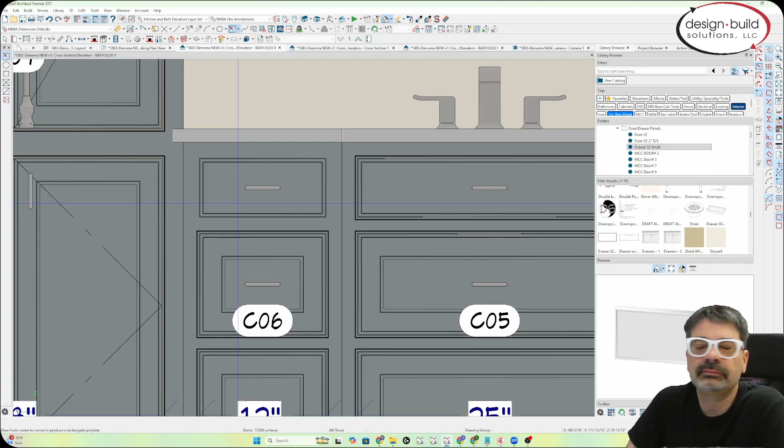So what I did with this situation was, let me delete this. I'm going to draw a polyline, closed polyline, rectangular polyline from the opening to the opening here. I have on my toolbars my edit behaviors chosen, selected all right here. I've got concentric, alternate, fillet, resize, move, default, etc. all right here.

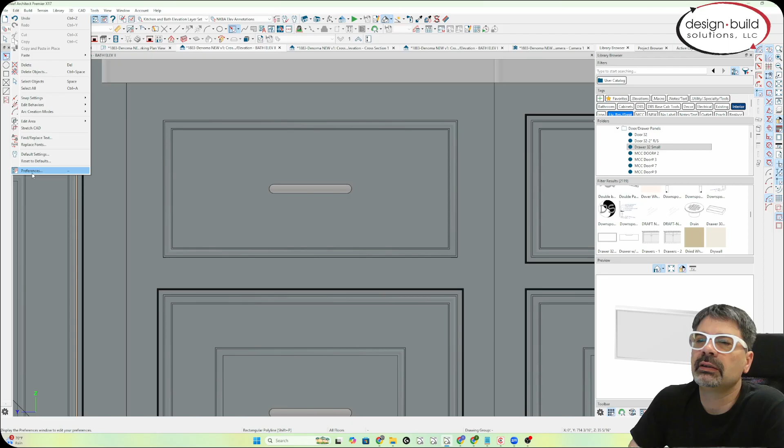So I just double click on this and it pops up with concentric. You can go to Edit, Preferences, Behaviors. I think in a Mac it's File, Preferences, Behaviors. But go to concentric, jump a 1/4 inch. In this case, that's what my bead is, a 1/4 inch. And then I'm just going to drag this one corner a 1/4 inch out, right?

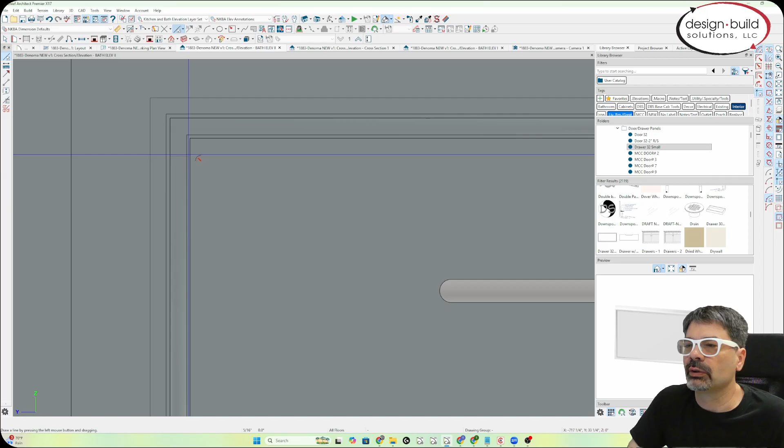Your profile may be different. Like this profile is a 1/4 inch. You could go whatever you'd like. I'm going to then select these. I did that all around all of the drawers. I selected all of the polylines and converted all of them at the same time to a molding polyline. Now it's going to initially pop up like this, a 1x1 square that's white. I changed that width to 1/16, height 1/16.

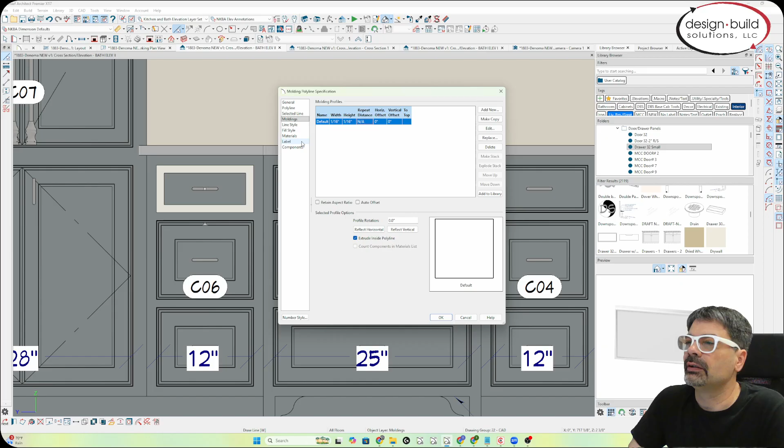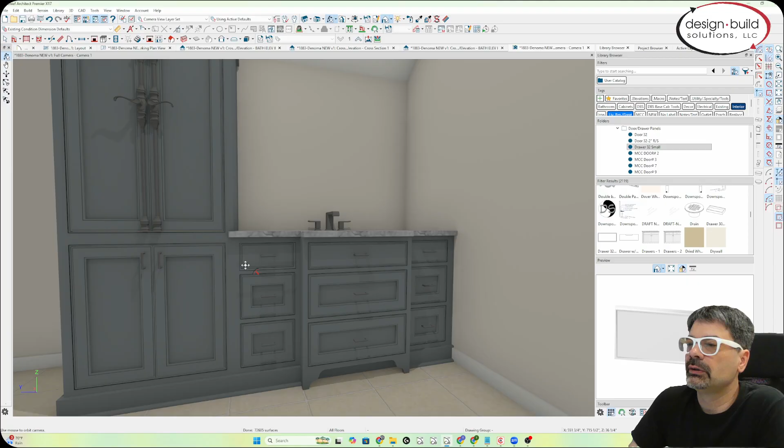And while I had all of them selected, I'm going to change the material to black, just to show the depth of things, right? So in that case, the elevation looks pretty close, right? Now I want to go to camera view, and you'll notice that polyline is for some reason set off of the face of the cabinet.

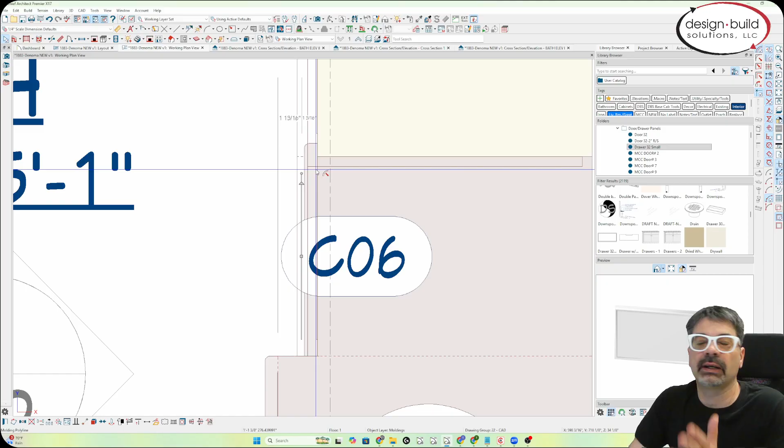So I'm just going to go to plan view, turn off my camera, and yeah, we can see that right there. So I went into my select contained objects mode and selected those. In my case, all 3 of them were right there. I selected all 3 of these and all 3 of these as well, and just moved one time, point to point move from that point back to the face of the cabinet.

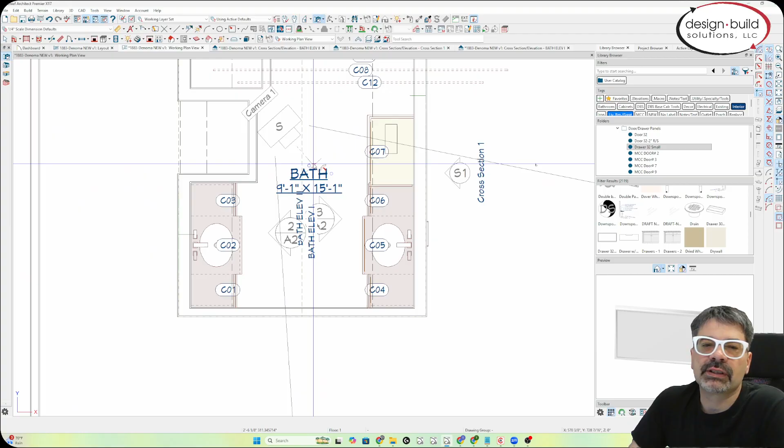Now I have a representation of a beaded inset look, right? Something that looks appropriate in the 3D, and there it is in the elevation.